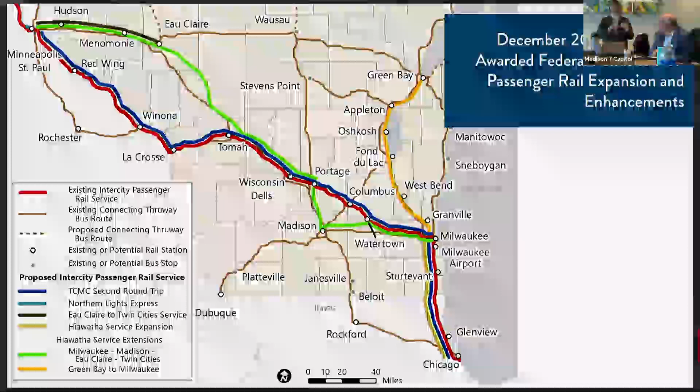And so what Madison is doing is trying to get our station site identified so that can essentially plug into this larger effort. So we'll have a station site identified as part of this study, and we'll do some high level cost analysis, and we'll do a little bit more of a detailed site plan, but we won't get into design and engineering quite yet. We'll wait until this process gets a little bit further along.

So a little bit more of what are we talking about when we are talking about a station - what does that actually look like? So depending on maybe your experience with passenger rail, maybe you've seen big, grand, historic stations, and maybe you've seen small buildings that are sort of like next to railroad tracks and kind of hidden, very functional.

But we're looking at different options for what that could look like in Madison, but specifically we're looking at some kind of station building or a space within a larger building. That would be things for space for bathrooms, seating, some ticketing or information, and not a whole lot of programming is really needed specifically for the station use.

But the bigger piece is the platform. So looking at about up to a 700-foot long platform. There's a few sites that the platform would not be able to be quite that long, but essentially what that is, is an elevated area along the track where people would be able to use to actually board the train itself. So the train would pull up to a platform and people would be able to walk onto the train. So that's a big part of the site selection - where can we make, where would there be room for that?

We're also looking at a site that would allow for the necessary transportation access and circulation needs. That means meeting ADA requirements, but also thinking about how people are getting to the station. How are they getting dropped off? If they're getting dropped off, how are they walking there? How are they biking there? Is there parking right on site or nearby? All these kinds of questions are related to that.

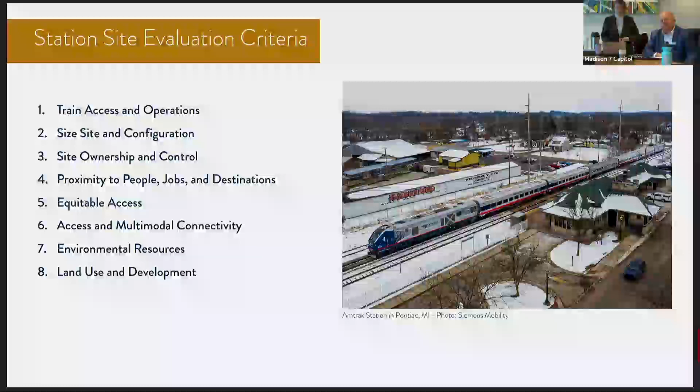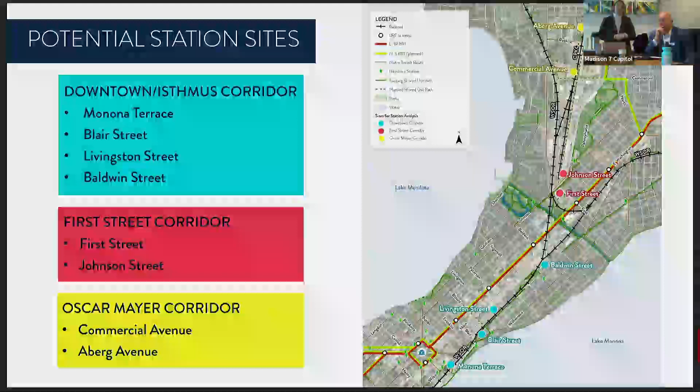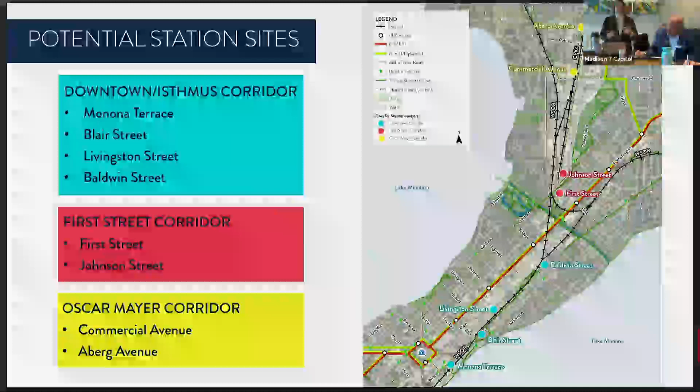So we're looking at a couple of sites that could be part of the future redevelopment of that area, and what that could look like as far as helping Madison realize the vision for the area — redeveloping it into much more of a mixed-use area with housing and commercial activity and things like that.

Getting into a little bit of the numbers for each site location, we start by looking at proximity to people — how many people are within a half-mile walk, a 3-mile bike ride, or a 30-minute transit trip from the station. Starting with the downtown stations, you have a higher proximity to people in that area; there's just more people, more density.

Moving out to the northeast area, the sites we're looking at, that proximity does go down. So considering proximity and how that impacts ridership is one of the pieces we're looking at. Then in a similar vein, looking at jobs — proximity to jobs. I think this is a good signal, not because we see a lot of commuters using the route, but for business-to-business travel, and also just as a general signal of commercial activity around the different sites.

There are some top visitor destinations out in the eastern part of the city, as well as the north side. So different things to consider there, but obviously proximity to those destinations is important because we know it needs to be really easy for visitors to get to those destinations when they get here if they're going to use the service. If they have to come in and use multiple modes of transportation that aren't convenient, it's going to be less likely that they're going to use this service.

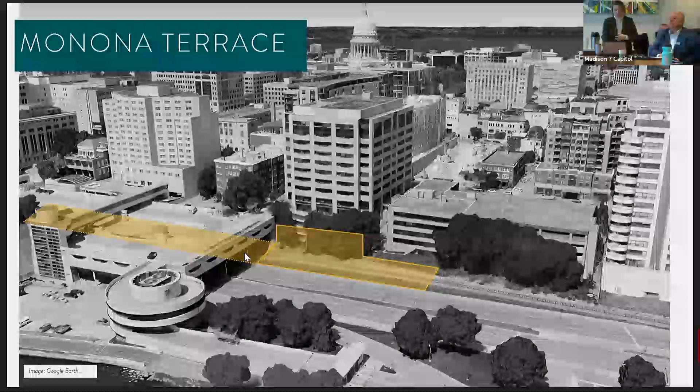Beginning with Monona Terrace, this site would be located basically as an extension of or add-on to that Department of Administration building you see right here. The platform would be along a rail line down here, and I'll show a bit more of a conceptual site plan, but it would extend underneath this parking deck, so the parking deck would stay. We're not assuming impacts to Monona Terrace—we understand the proposals for redevelopment of that area long-term, but for right now we're just considering no impacts to Monona Terrace directly, other than going underneath that parking deck.

A general site plan for that area is shown here. You can kind of see there would be a new passenger track that would come in, and the platform would be in between the existing and the new track. This could either be part of the existing building, or more likely basically an extension of this building, so people would be able to access the station from coming here. Then there would be a vertical circulation element needed to get people from the higher level down to the track platform.

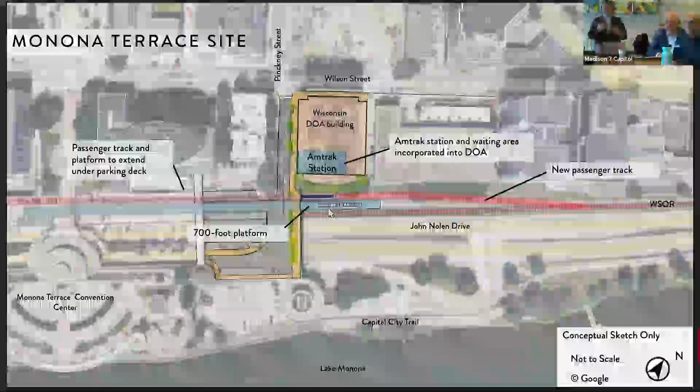Parking for this area—there wouldn't be parking accommodated directly on site, but folks would be able to use nearby public parking garages, and we would develop agreements internally within the city for overnight parking. A couple of the challenges with this site are the geometry of that area right under the terrace—it's a tight space, and construction could be challenging, but we do think it's feasible. Another challenge is access by automobile—if people need or want to get dropped off, that's going to be a little bit tricky here.

But there are a lot of opportunities with this site, with proximity to so many places to go, so many existing people, population in the area, jobs in the area, and just the overall ability for people to get out of the station and walk out and be so close to the Capitol Square is a big important factor.

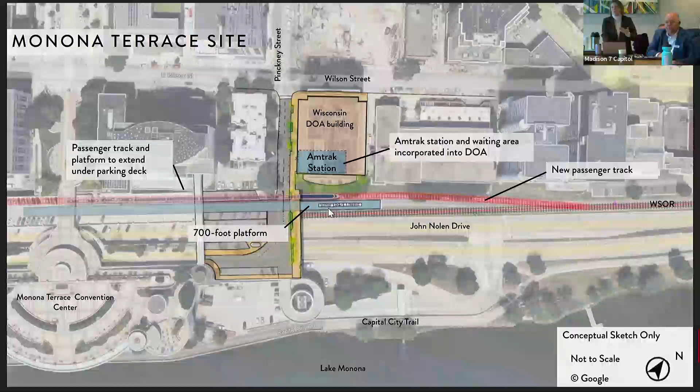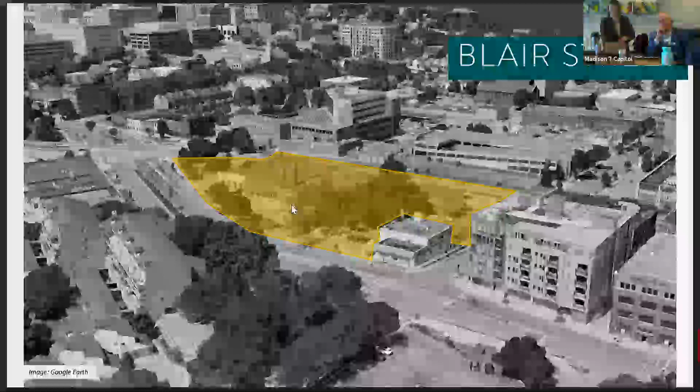Another site nearby is the Blair Street site—this is the site of the current Gateway Mall site. The concept for this site is that it could either be developed within this existing development, but more likely as a redevelopment of this site. As many of you may be aware, this site is being redeveloped right now, so generally the thought process is this area would be redeveloped at some point, and maybe a station could be part of that. That's kind of how we're showing it—again, a very high level conceptual diagram, but the station would be part of a larger new development.

Different options would have to be considered for that. How do you address that? You could do it with a grade separated crossing, close it, or maybe there's another option.

And then what else with the site? I think just overall that this is a great site from a proximity perspective. It's a little bit closer to some of those destinations along East Wash versus the Monona Terrace site. Great multimodal access—the Capital City Trail comes in here, so that would have to be integrated into the site. And how do those connections work? But this could be an opportunity for kind of a larger redevelopment, which the station would be a part of.

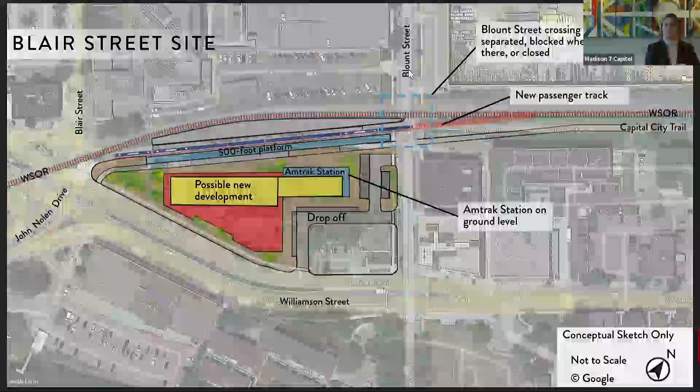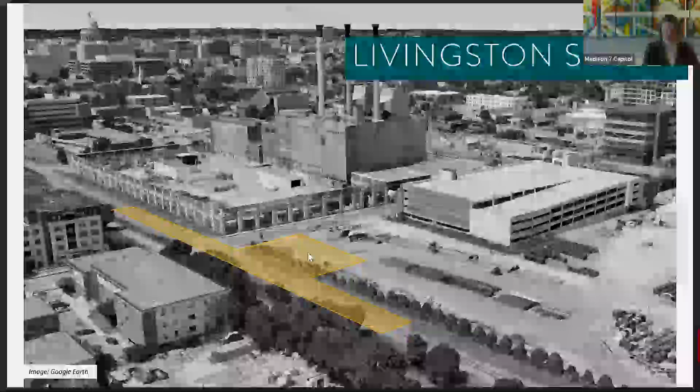Another site we're looking at is Livingston Street. So an opportunity with this site is there's a lot of room for a platform here, but the station could be located really anywhere along this strip. We're sort of showing it in this corner, but that again is very preliminary, with the platform along the track here.

And just a high level idea of what this could look like. We don't know what the future of the overall site here looks like, but it is another challenge with the potential for the Livingston Street intersection to be blocked. We do have that public garage right there, the Livingston Street parking garage, which could provide parking for folks overnight easily, and also good proximity and access here. Not quite as strong as the Blair Street and Monona Terrace sites, but still very much within a lot of that activity for businesses and visitors and things like that.

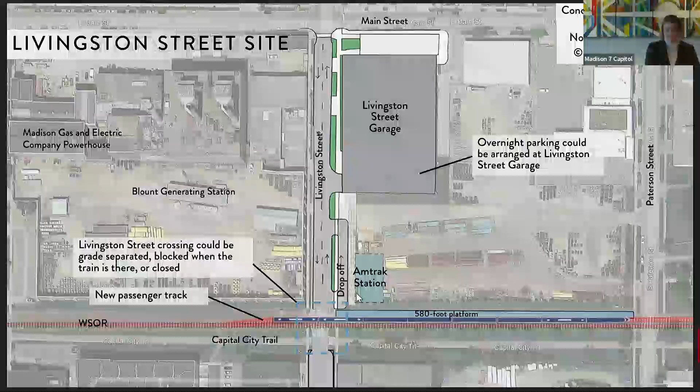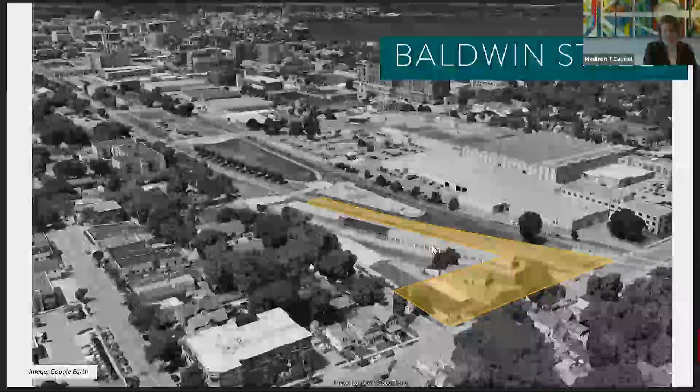The Baldwin Street site. This is a site that would actually be an extension of McPike Park, which you can kind of see in this aerial right here. It currently houses warehouse buildings, but it is owned by the city of Madison, so this site kind of has that opportunity going for it. The plan for this is, again, an expansion of the park, so the station could be part of that. It's a little bit of a different use for a station, but potentially interesting to have it as part of a park.

Some of the challenges here would be that the land use is a little mixed. You've got commercial areas to the north, but then to the west, and to the east and north you've got more of a residential area. So how well does that mesh with a passenger rail station? I think that's part of what we'll evaluate.

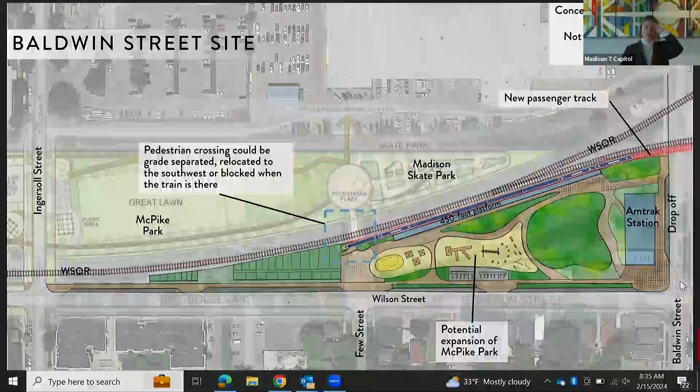Also, there is a pedestrian crossing that currently goes over the tracks that would be blocked when the train is serving the area, so that's something that would have to be looked at. This site also would only be able to accommodate a 450-foot platform, so again that's just another consideration of what might make sense for the site. And there are some train operational challenges here, just the way the tracks come in, having the train stop basically on a switch. So what does that look like, and is that something that will work here?

Excuse me, there we go.

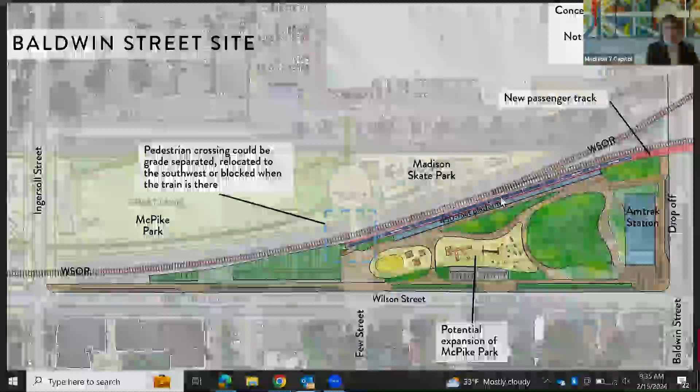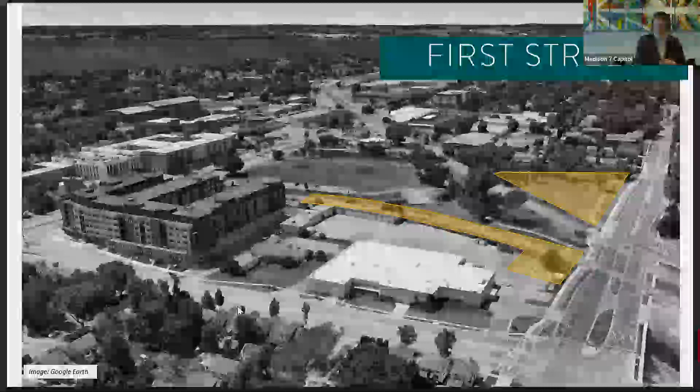Okay, now moving up to the First Street area. This is the site of the future Madison Public Market. So the concept here is that the station would actually be right on that site, but as a separate building, and then potentially having parking over here, or maybe there's another redevelopment where parking could be shared. That would have to be discussed if the site moves forward, but that's just kind of how we're showing it preliminarily here.

I've heard a lot of people say maybe that surface parking isn't the best use for that site right there, but maybe there is an opportunity to share parking with other development here if there isn't enough parking on that site to accommodate the station, which we don't think there will be. So an opportunity with this site is it's owned by the city of Madison, and I think it could be an interesting complementary use with the public market.

A couple of challenges with this site are the curve there. It's not necessarily ideal to stop on a curve, which is why we wouldn't expect to stop on a curve—we would build a new passenger track that would be straight in this area to serve the platform, which would require a shorter platform, again looking at about 400 feet. What that would mean is basically that the train would come in, stop at the platform, and only certain cars would be served, which is pretty typical. It's not atypical for smaller stations to have that characteristic where only certain cars are served.

And basically what would happen is folks would just move within the cars to access the platform. So instead of just getting right out the door of their car, they would just have to move forward or backward to do that.

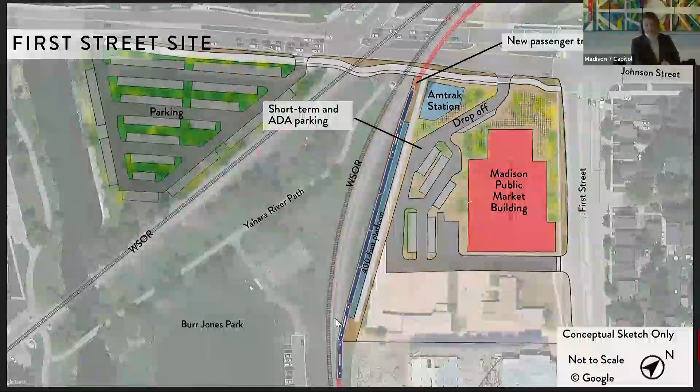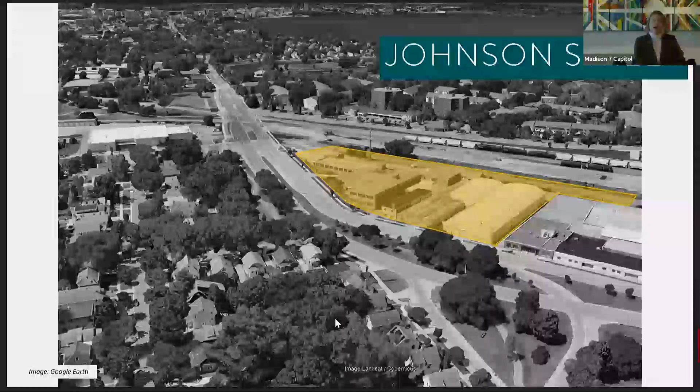The Johnson Street site is in that area of the First Street future Madison Public Market. We're envisioning this as a potential for a future redevelopment of this area, which is generally planned by the city in our comprehensive plan.

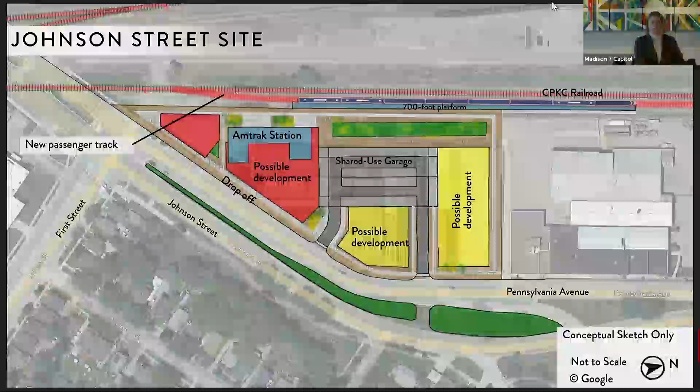This is an example where, from a rail operations perspective, it works nicely. You're able to fit that full 700-foot platform there, and you could potentially service the train on site because this area is a rail yard. So there might be an opportunity for that to work well, depending on the development in the surrounding area, as part of a bigger mixed use redevelopment.

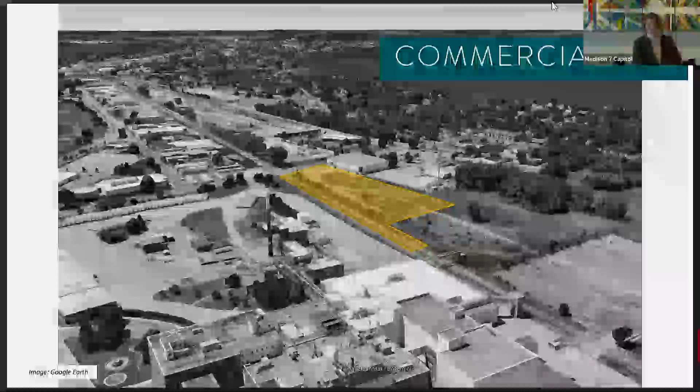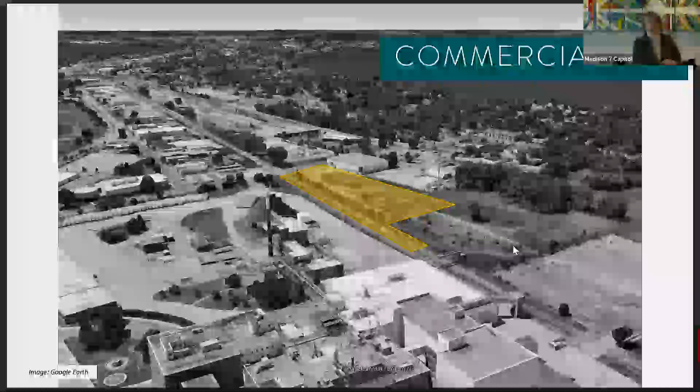Moving up to Oscar Mayer, the Commercial Ave site is currently vacant, but there are a couple of developments in progress in this area. Not on this site itself, but there are multiple housing, multifamily, and senior housing developments occurring nearby. So something to consider is whether or not that's complementary - in some cases it is, and in some cases, depending on the details, it may not necessarily be complementary for this site. We're working through what that might mean for this site location.

It does provide a lot of room for a large platform. Some other challenges for the site would be that we'd be looking to enhance a connection to the bus rapid transit station planned nearby. This site isn't quite as walkable, bikeable, or accessible by transit as some of the other ones, so another thing to consider is how do we make those changes happen.

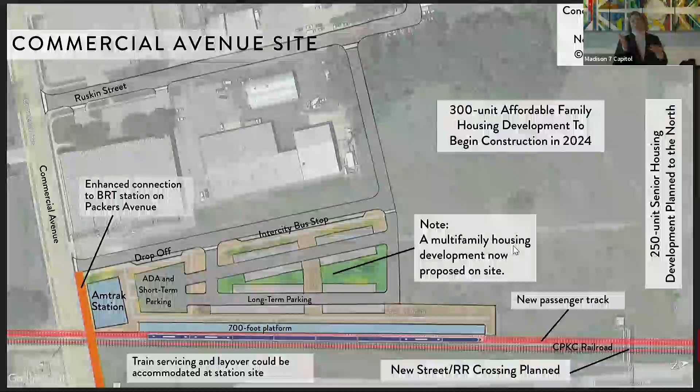Again, this site we're showing as a standalone building, but I think for any of the sites we'd consider what the surrounding buildings are and whether there's other redevelopment that could coincide here. And then finally, the Aberg site.

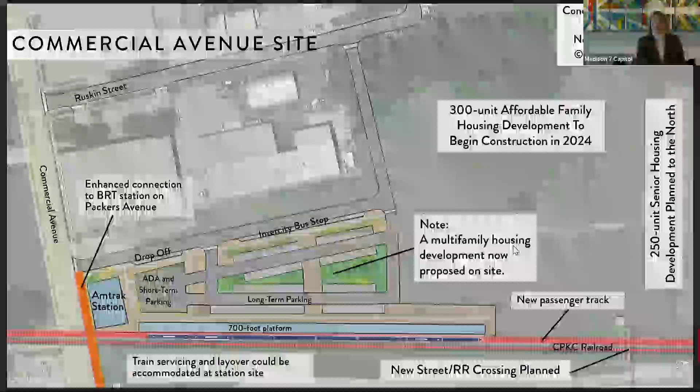This site is the former North Transfer Point by Metro. Here, again, we're looking at more of a shared use, multi-use redevelopment with potential for shared use parking. But this site, similar to Commercial Avenue, would probably need some enhancements as far as multimodal accessibility, improving connections to the BRT station planned for Packers Avenue, and more opportunity for parking on site, as well as the potential to encourage more economic development in this area.

Also, both of these sites - the Oscar Mayer corridor and the First Street site - work nicely from a train operations perspective, because the train could come in from Milwaukee, and with the future extension to Minneapolis, essentially just turn up and head north. This compares to the downtown sites, where the train would come in, actually change directions, go out the other way, and then eventually go up.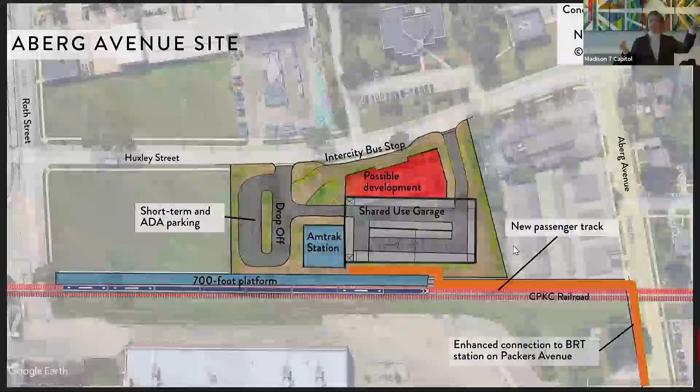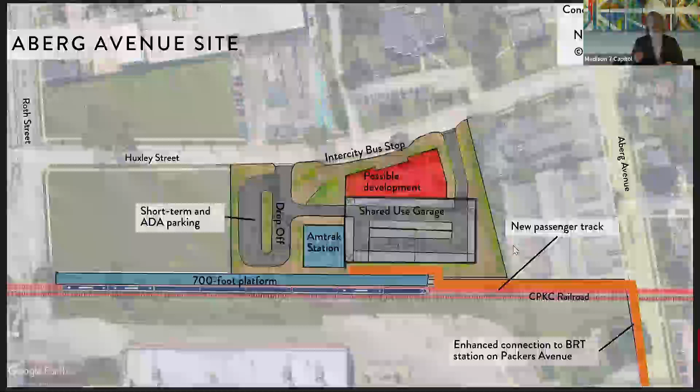A couple of things we've heard from Amtrak and WisDOT on that is, depending on who you talk to, that's maybe not that big of a concern. Part of the idea is the train's already coming to Madison, so coming an extra 10 minutes to come downtown isn't maybe that big of a concern, because if your concern is to get from Chicago to Minneapolis, you're probably going to take the other route that's more direct. So if you're coming to Madison, there isn't a strong argument for not coming downtown because of the timing.

So then the route planning and service development timeline overall - we're looking at the potential to have this station open to service around the 2030-2031 timeframe. That is, if the corridor scoping and corridor planning process moves forward on the schedule that Wisconsin DOT is looking at, then they could potentially enter corridor development in 2026 or 2027.

That would allow a couple more years for the detailed design and engineering, then design and construction in the following years after that. That would include both design and construction of the Madison station, but also other improvements. The route would run on existing tracks, but some improvements would be needed to make those tracks serve passenger rail, because right now they serve freight, and freight doesn't require as smooth a track or the speeds we'd be looking at for passenger rail service.

What's next for our study is collecting public feedback. We had a couple of meetings in late January and early February, and we're accepting public feedback on these 8 sites through February 29th. We'll continue meeting with various stakeholders and property owners to refine our evaluations and get a better feel for the potential of each site. We'll identify a draft recommendation in the spring or summer timeframe with a more detailed site plan and cost estimates. Then we'll come back to the public with that draft recommendation for one more round of feedback before finalizing it.